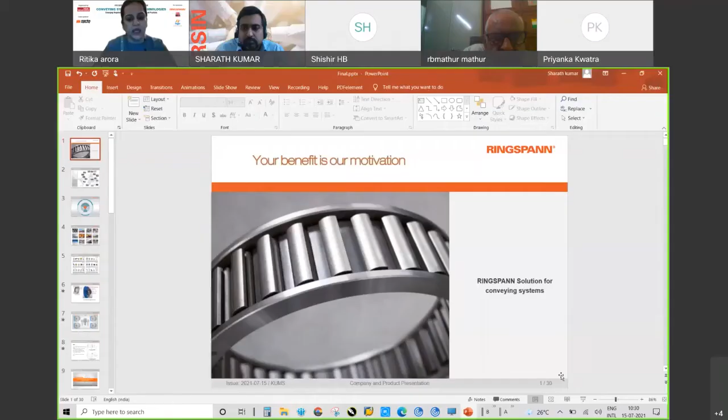Okay, I'll just introduce you. Mr. Sharath Kumar is Head of Business Development at RINGSPANN. He has over 15 years of experience in different sectors of industrial engineering products. He's one of the leaders in the development of the RINGSPANN keyless connection market in India and has developed a special one-way clutch with a thermal expansion compensator for industrial fans, an overload clutch for wagon tipplers, along with integrated solutions with a one-way clutch and brakes for ball mills. He holds a master's degree in industrial product design.

Sir, I think you should be having the presenter rights now. Yes, hope you can see my screen and hear me. Yes, we can see it. Yes, sir.

Okay, good morning everyone. First of all, thank you very much to India Infrastructure for giving a platform in this difficult situation to connect with everyone. So basically this presentation is divided into two parts. I have a little bit about the company, and then we'll go to the solutions which RINGSPANN can offer.

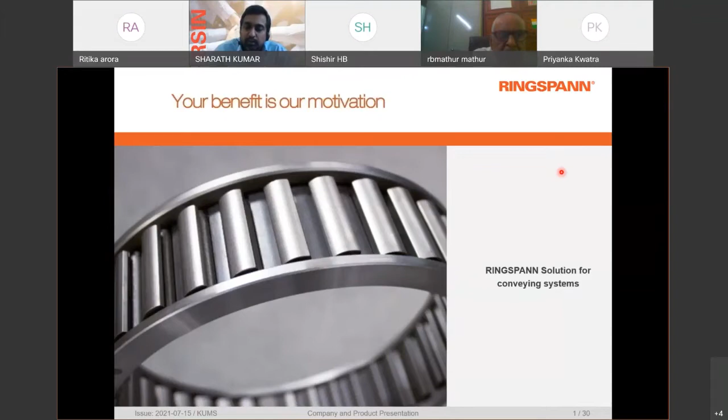RINGSPANN is a German organization with more than 75 years of experience, and we have manufacturing facilities.

Hello, there is a disturbance. Can you please someone mute it? Yes, sir.

So RINGSPANN India is located in Pune, and we have our offices in Germany, Italy, and also in China.

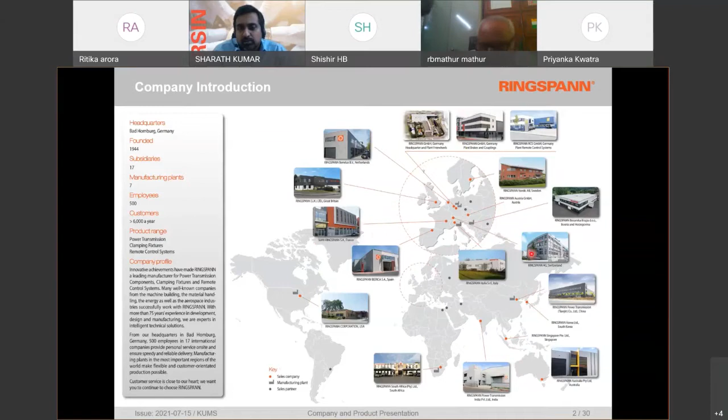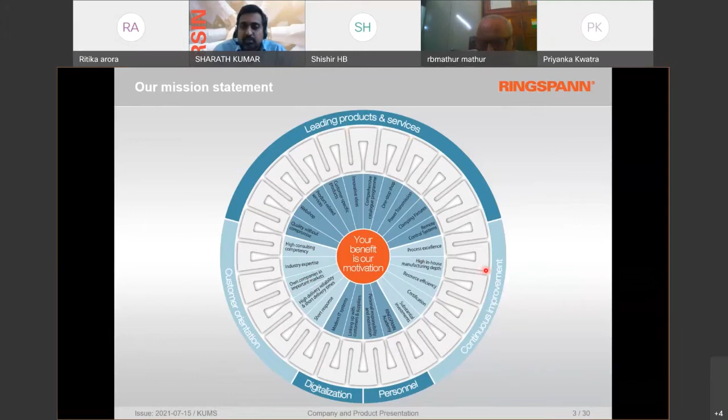Our mission statement, RINGSPANN, working on your benefit is our motivation, and it is around leading products and services, continuous improvement, digitalization, and customer orientation.

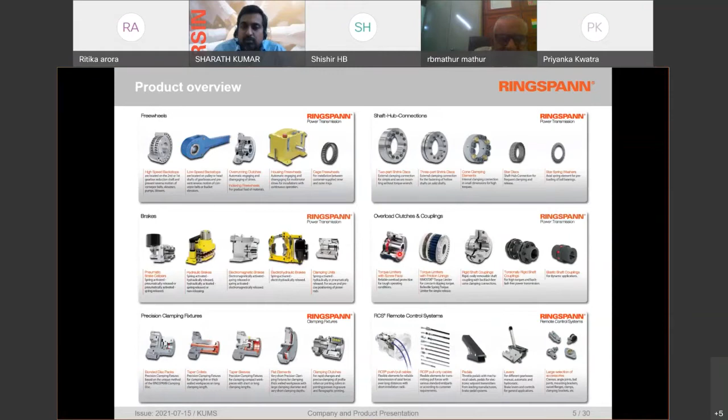Our main products are free wheels, generally called a one-way clutch or a backstop. We also have shaft connections, generally called a shrink disc, taper lock, or keyless connection. We also have a wide range of brakes starting from hydraulic, pneumatic, and electro-hydraulic brakes, as well as a huge range of couplings and torque limiters.

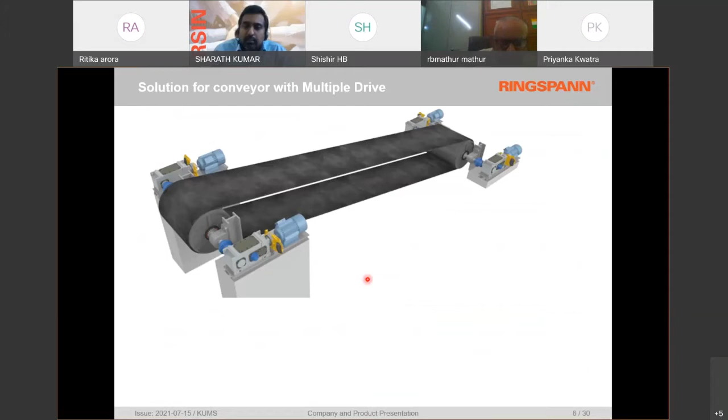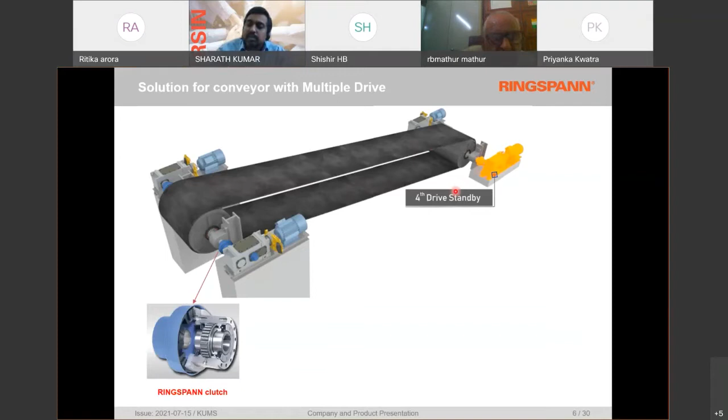Solution for conveyors in a multiple drive system. Mainly in a multiple drive system, you can see here there are 4 drives, 3 of them in operation and 1 in standby. We can find such conveyors generally in long distance or high capacity conveyor systems.

For this application, we have a one-way clutch which can facilitate automatic engagement and disengagement of the drives. We also have a special torque limiting backstop which will facilitate load distribution, better.

Hello, someone from India.

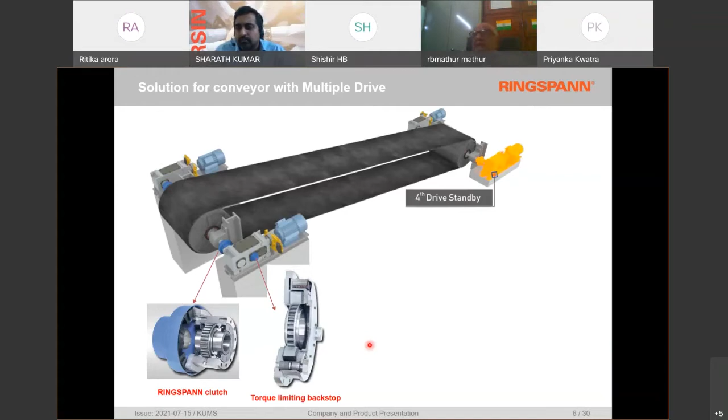So what is the difference between a standard backstop and a torque limiting backstop seen here? You can see the standard backstop has an inner ring, cage, and outer ring. However, when we look at a torque limiting backstop, it has an inner ring, cage, and a friction pad which will facilitate slipping of the backstop and distributing the load between all the drives.

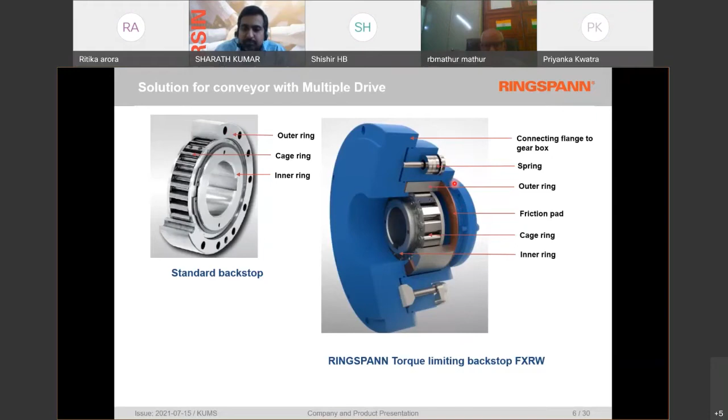There's also a spring and a compressed spring for keeping the elements together and setting the torque for distributing the load at a certain level. Here you can see a small video - when generally the conveyor is running, the backstop is freewheeling. That means there is no contact, and because of a lift-off design, no wear is taking place.

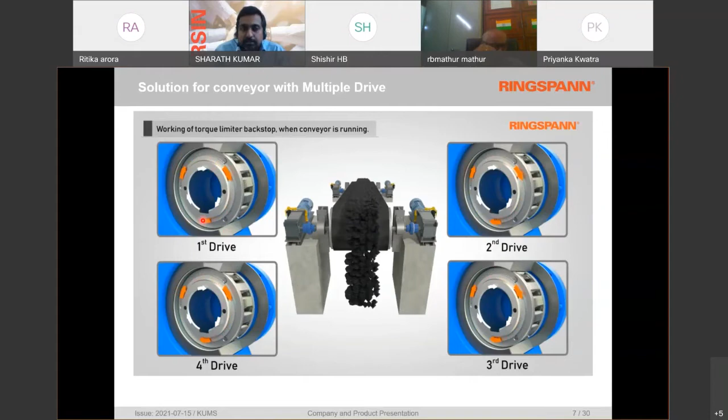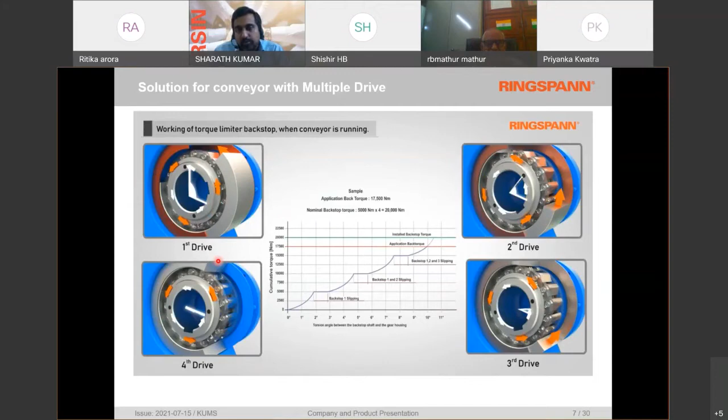But as the conveyor stops, you see the first drive slips, then the second, third, and fourth. This drive slipping concept is where the entire reverse load of the conveyor is distributed equally between all four drives.

What is the benefit of using a torque limiting backstop and an overrunning clutch in a multiple drive conveyor system? First, it gives flexibility to automatically engage and disengage the drive systems. There is no need of stopping the conveyor, especially if you're using a jaw clutch mechanism.

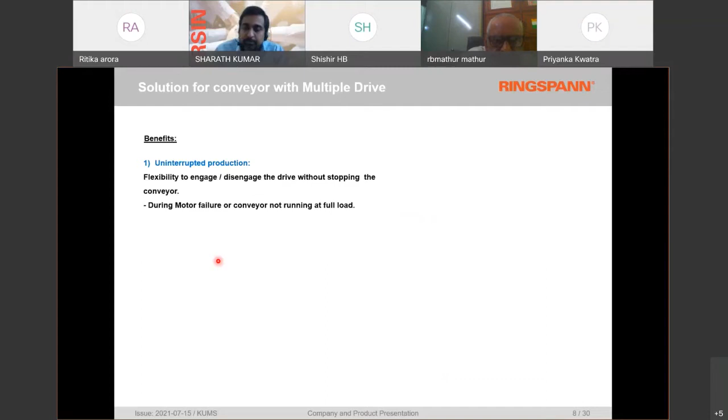An optimum cost-effective design - generally if you use standard backstops, the peak load could be around 2.75 times. But if you use a torque limiting backstop, you can select it with a minimum service factor of around 1.2 itself. With this, you can reduce your complete drive system and optimize the entire drive system.

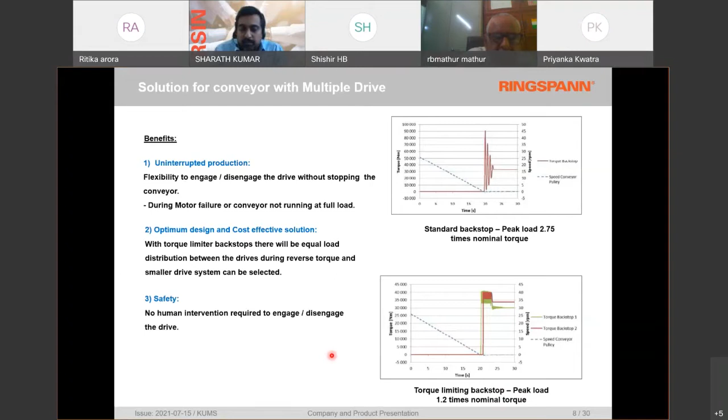The third point is safety - there is no need of any human intervention, so human error or any damages can be avoided. This can be done directly from a center system.

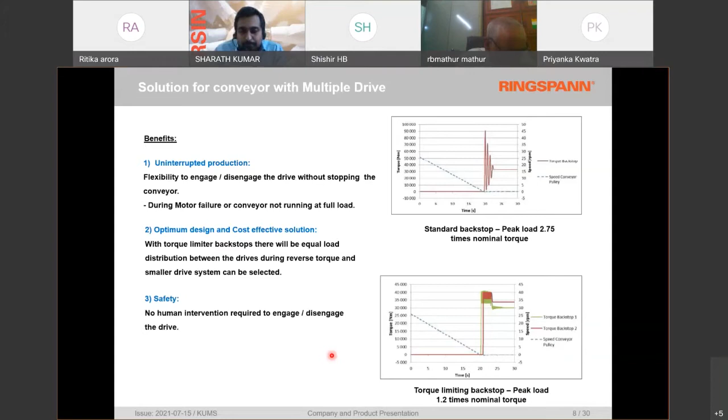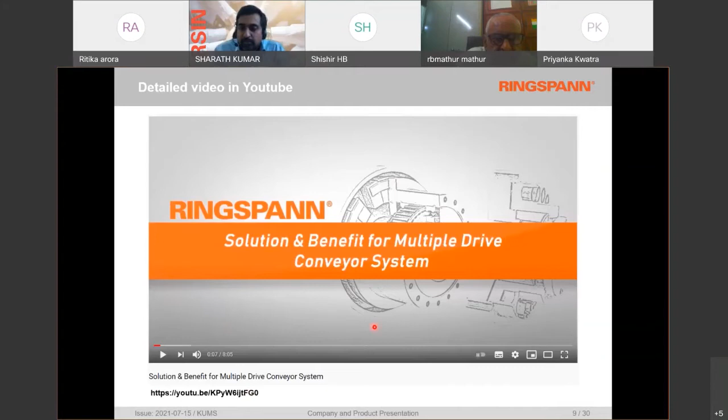We also have a very good video on YouTube where you can look at the detailed working of this backstop and clutch. It's available on YouTube, given in this link, and I kindly request everyone to look into this and understand how it completely works.

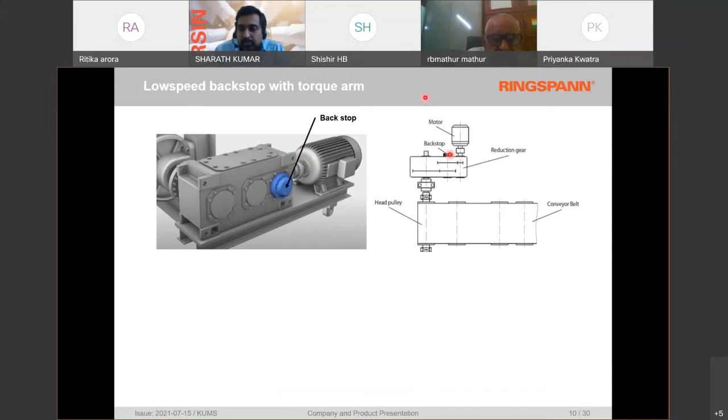Another product which I would like to discuss is the low-speed backstop. We generally know that backstop for an inclined conveyor is fitted on the gearbox. This is the location you can see here.

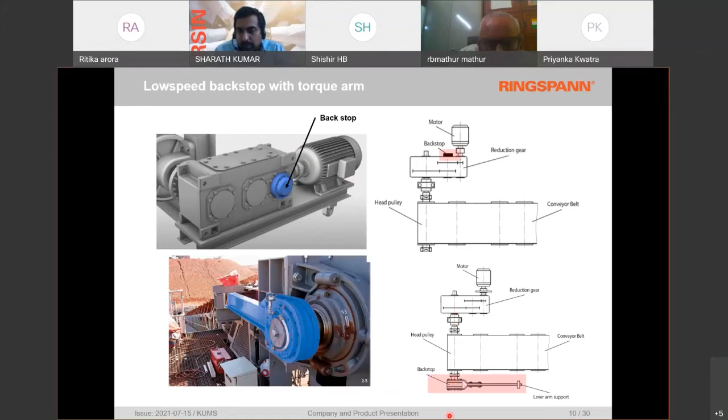But there is always a possibility the backstop can be directly fitted on the pulley shaft as shown below. So what is the benefit of this kind of arrangement? First, it acts as a primary safety device, so any damage in the coupling, gearbox, or any components, your pulley is still ensured it will not roll back in case of inclined conveyors.

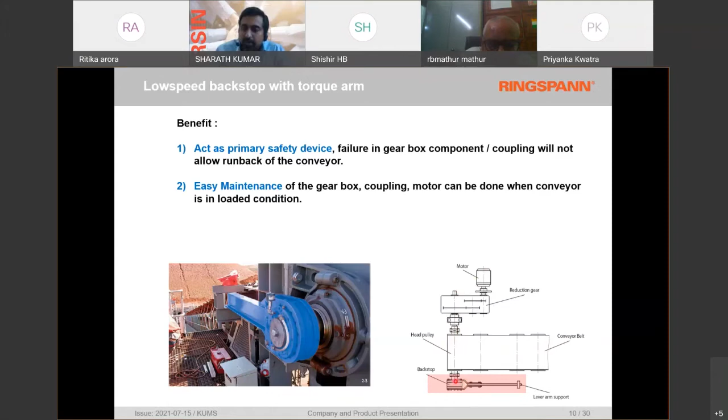Another important point is easy maintenance. Generally such breakages take place when a conveyor is in loaded condition, but then you have to unload and do all the activities. By using a low speed backstop as shown below, you can change the gearbox, coupling, or motor while the conveyor is still loaded, because the backstop is directly on the pulley and can hold it from running in reverse.

Also, when we speak about CST drives, it's very critical, because in the CST drive there is no possibility to put a holdback directly on the gearbox. So the only option is to put a low speed holdback or torque arm holdback directly on the conveyor pulley.

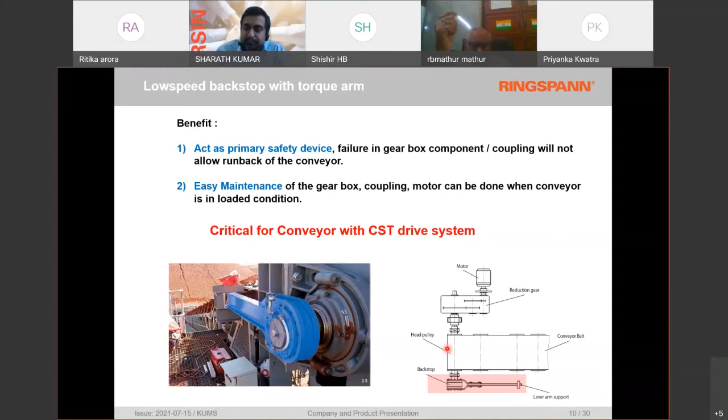Ringspann also has a wide range of brakes. We have brakes starting from 0.2 kilonewton meter to even the big brakes used for downhill conveyors or port applications, ship-shore cranes, going up to 750 kilonewton meter of torque.

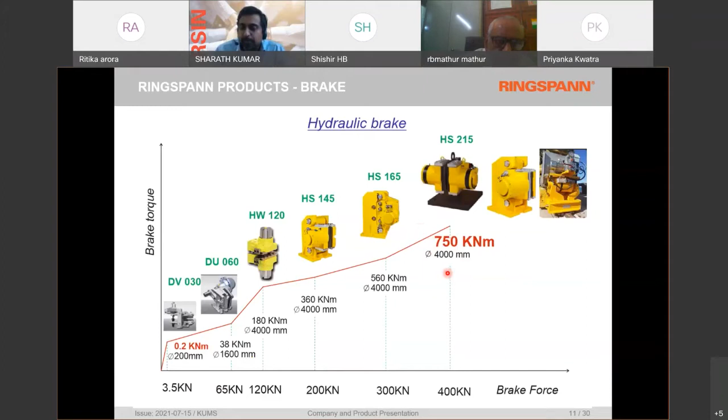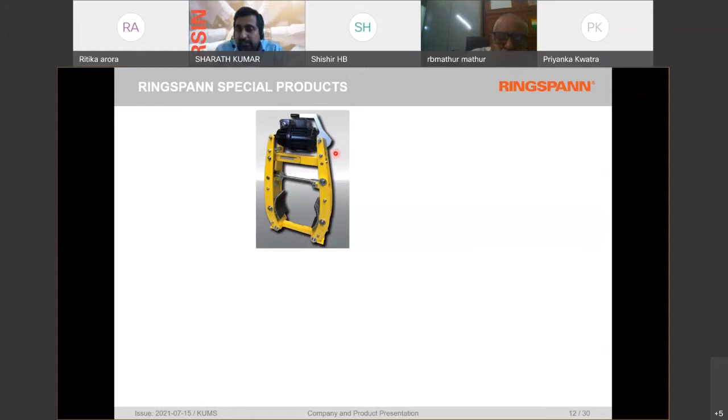We also have special brakes like this one shown here. This is a thruster drum brake, but with a horizontal thruster mounting. The biggest benefit of this horizontal thruster mounting is you can reduce the overall space, especially in a crane application or in a stacker reclaimer.

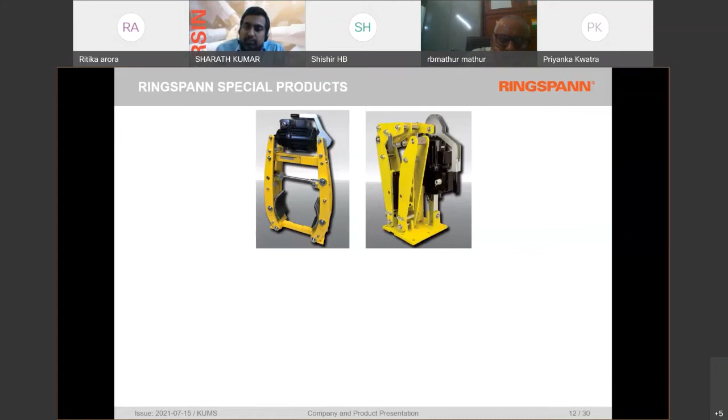We also have brakes with thruster disc type, very much used in wagon tippler applications for quick reaction.

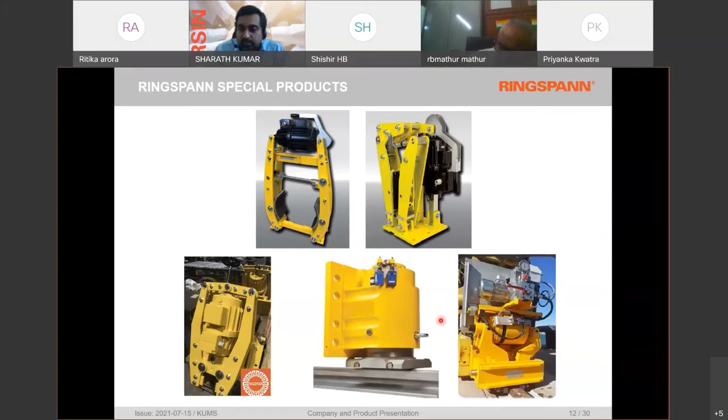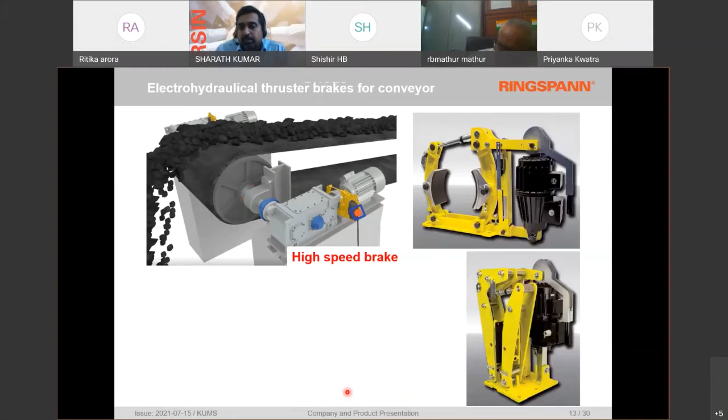Electro-hydraulic thruster brakes are quite common in the market, and what RINGSPANN offers is that all our electro-hydraulic thruster brakes are provided with automatic wear adjustment.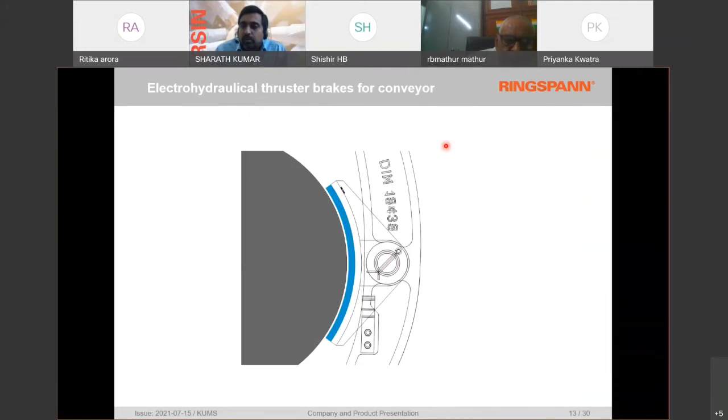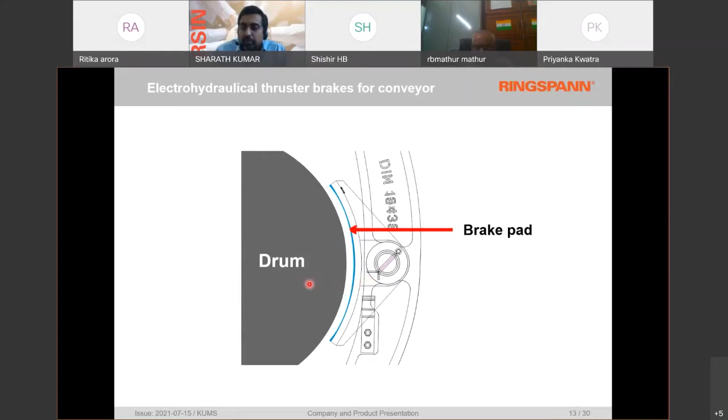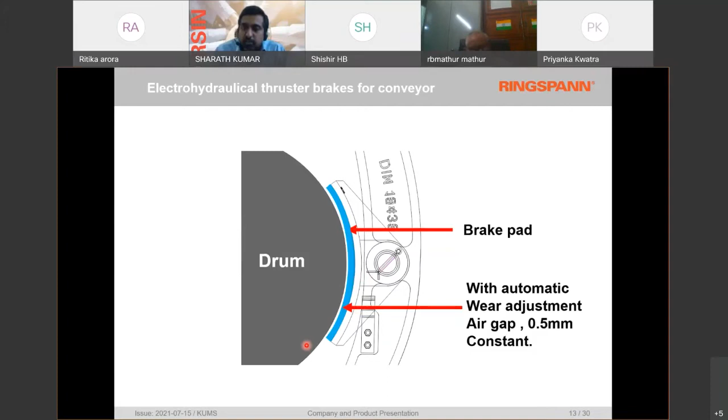The benefit of automatic wear adjustment: we all know every time the brake is applied, you can see here this is the brake pad and this is the drum. Every time the brake is applied, a gap is created between the drum and the brake pad. This gap continuously increases until someone manually adjusts the brake. But with automatic wear adjustment in the thruster brakes, this gap remains constant at 0.5 mm, so human intervention to adjust the gap can be completely avoided.

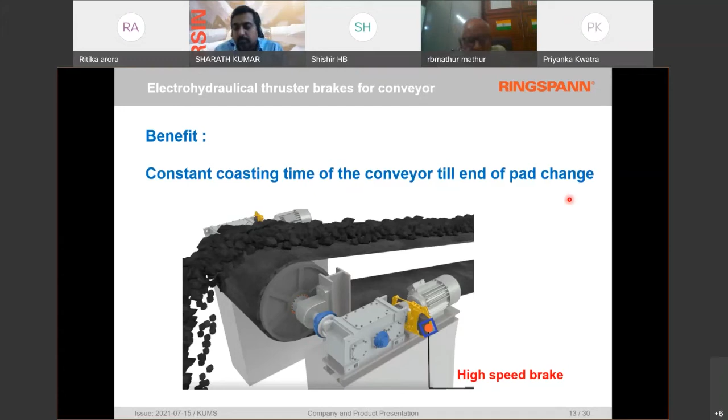The most important thing is, what is the benefit of using such a design? The coasting time of the conveyor will remain the same until the end of pad change. Because the gap is constant, the time loss due to closing the gap and the braking force loss is completely avoided, and you get very good repeatability, with the coasting time remaining constant.

Some more benefits of using RINGSPANN thruster brakes. First, these thrusters are 100% RINGSPANN's own thrusters, made in our European works. Second, we give thrusters with automatic wear adjustment, and all our brakes have C3 painting, making them suitable for corrosive atmospheres, and designed as per DIN standard, so replacement of brakes can be done very easily in the future.

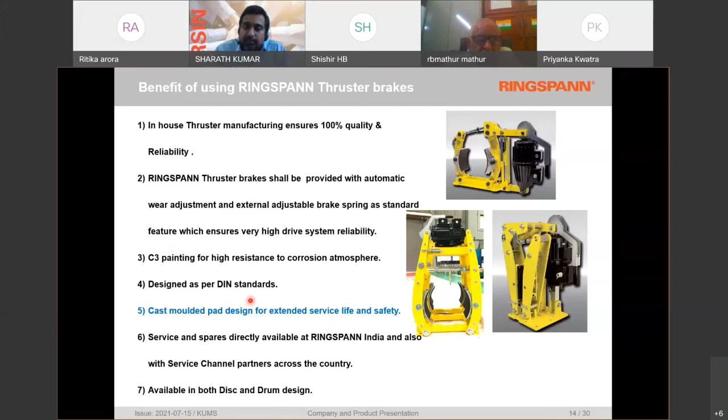Our brakes are also provided with cast mold pad design. Generally brake pads are provided with a riveted design, and because of this design, the riveted design limits prolonged use of the brake pads, as the rivet comes in contact with the drum and causes damage to the drum. But RINGSPANN provides a cast mold and resin integrated pad design. Because of this, there is no rivet, and you can use the pad to its fullest capacity.

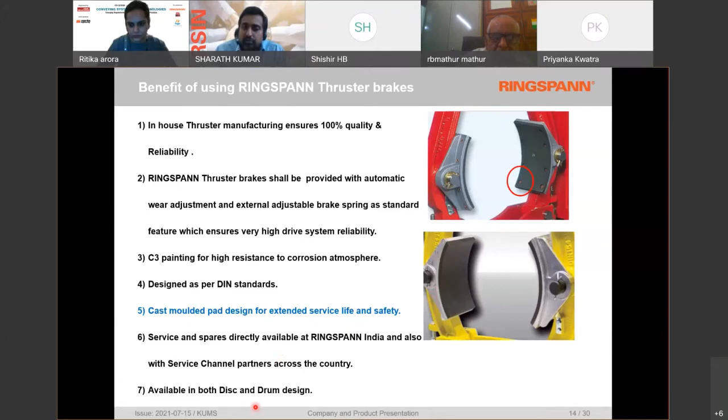Moreover, the brake shoe is provided with an aluminum material, so that after prolonged use there will be no damage to the customer's equipment. We also have spares available directly in India, in both disc and drum designs.

Some more options for these brakes. We have brakes with throttle valve. In certain applications, you want to close the brake in a controlled way, so that quick action doesn't take place. So we can give brakes with a throttle valve, so that slow application of the brakes can take place.

Heat resistant design with wider brake shoes. In some applications, the brake pads get worn out very often, so in such cases we can surely use wider brake shoes. Friction lining with sintered material is also available. We also have thrusters with special oil grades for -30° operating temperature.

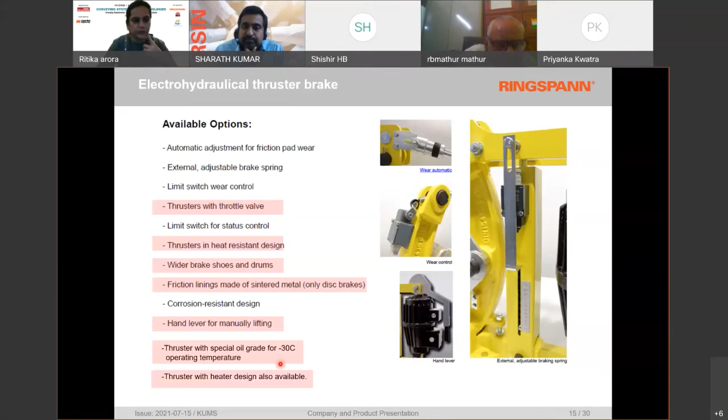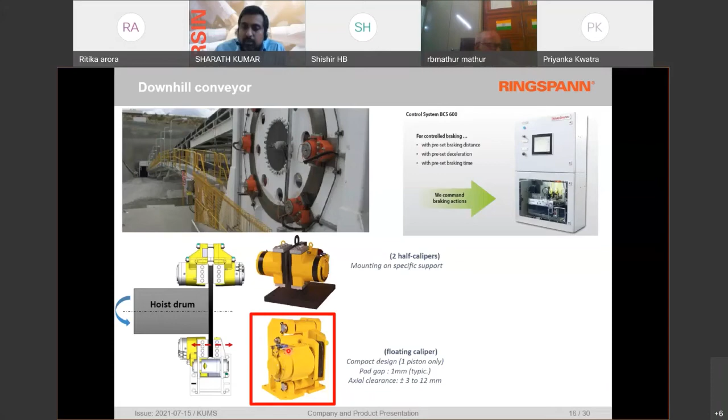We also have solutions for downhill conveyor applications. We have two types of brakes for downhill conveyor. One is with a double jaw, which is quite popular in the market, but we can also use a floating caliper design. The benefit of a floating caliper design is, first of all, it's cost effective compared to double jaw, and also it can accommodate up to

3 to 12 mm of axial misalignment. So if this pulley is trying to move a little bit, we can use a floating caliper design which can take up this type of movement. We also have a control system with hydraulic power pack, especially for downhill conveyor. So this is also available with us.

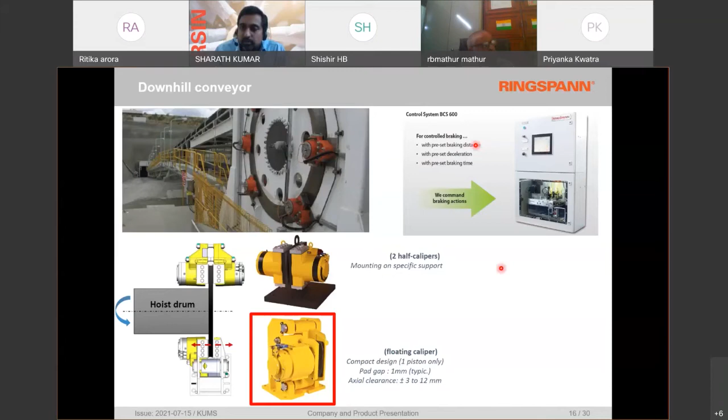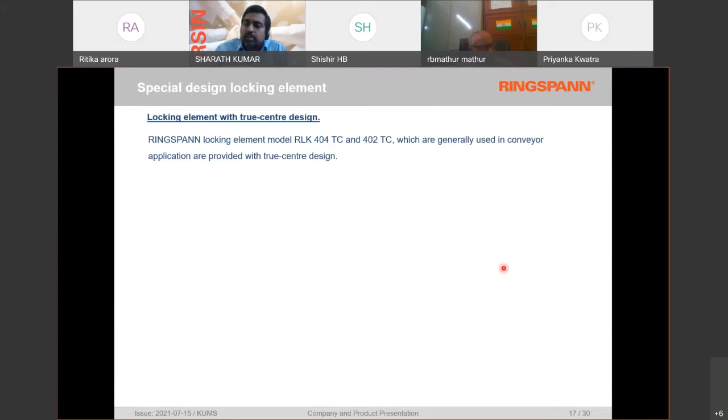We also have special locking elements. Generally, RINGSPANN locking elements are provided with a true centering design. You can see the difference here between both types of locking elements. The true centering design means it is not completely split, it is half split. But the other locking elements generally available in the market are totally split into two halves.

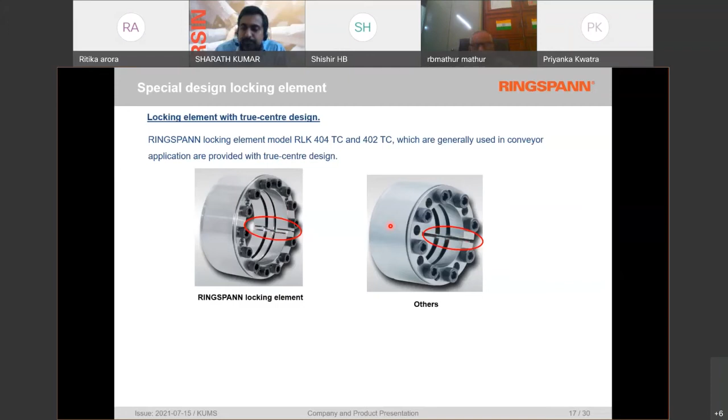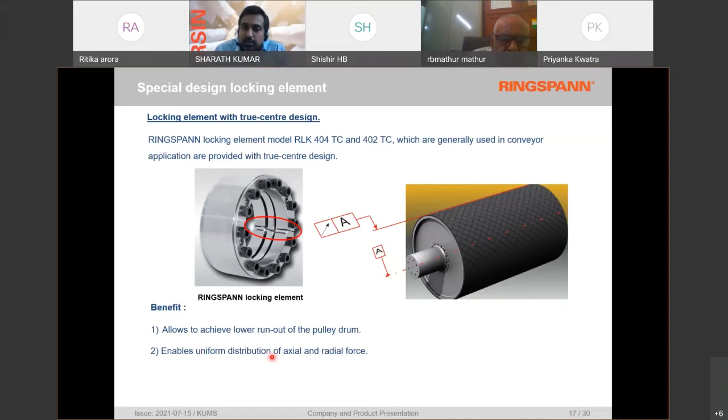So what is the benefit of using a true center design? The first benefit is you get a very good runout compared to a completely split design. As this is half split, it will ensure there is no much variation between the shaft and the pulley outer diameter, and in turn it will also increase the bearing life. Also, it helps ensure uniform load distribution, and also gives easy assembly.

A general problem with locking elements is that after a few years of operation, it is very difficult to remove them from the conveyor pulley. That is due to fretting corrosion and also no much clearance at the backside. But by using this design, it will ensure the pressure generated on the pulley is always constant, and also ensure you can remove the locking element from the pulley very easily after prolonged usage.

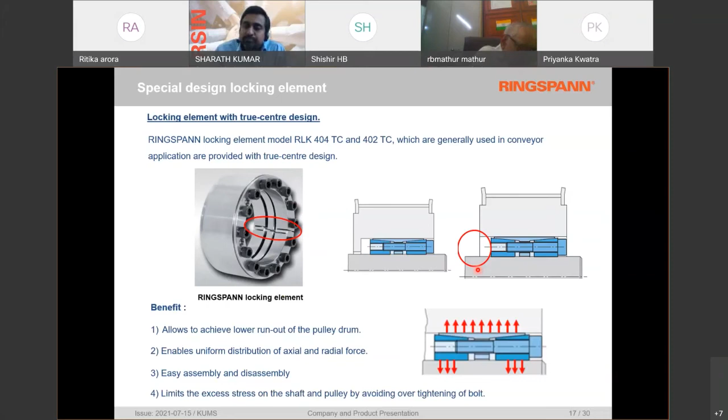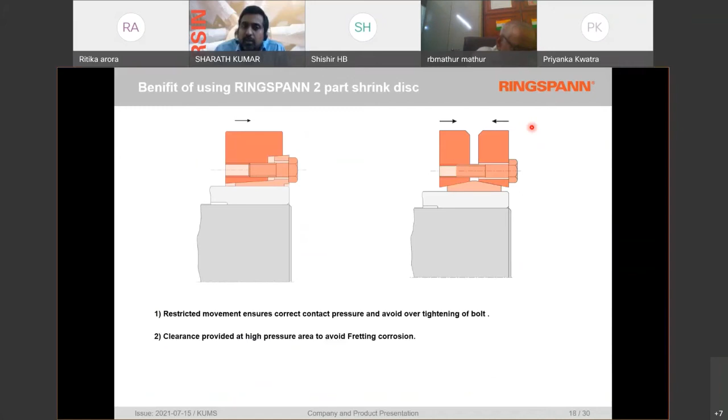We also have two different types of shrink disc. You can see here, this is a 2-part shrink disc and also a 3-part shrink disc available with us. The benefit of using a 2-part shrink disc is mainly related to avoiding fretting corrosion. In a 2-part shrink disc, you will not be able to over tighten the bolt, so the pressure generated on the shaft will be constant, and fretting corrosion could be avoided.

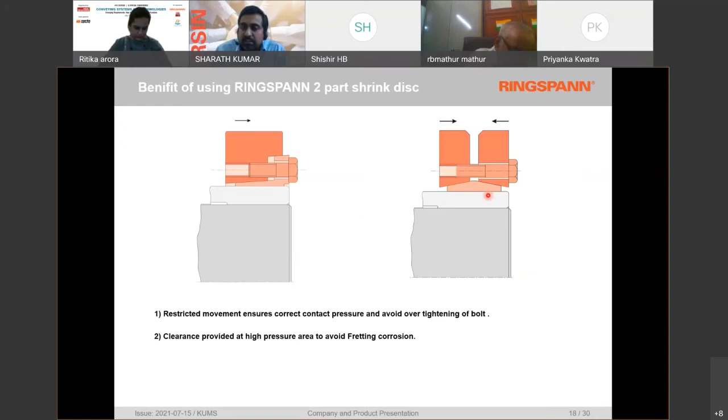Jacking holes are also provided in the 2-part shrink disc, you can see here, so that after years of operation, especially in stacker reclaimers, you can use the jacking holes and pull the shrink disc out. Generally in a 3-part shrink disc, you don't have this, and the inner cone will almost get stuck with the hollow shaft of the gearbox, so generally you have to cut and remove it. Such issues can be avoided by using a 2-part shrink disc design.

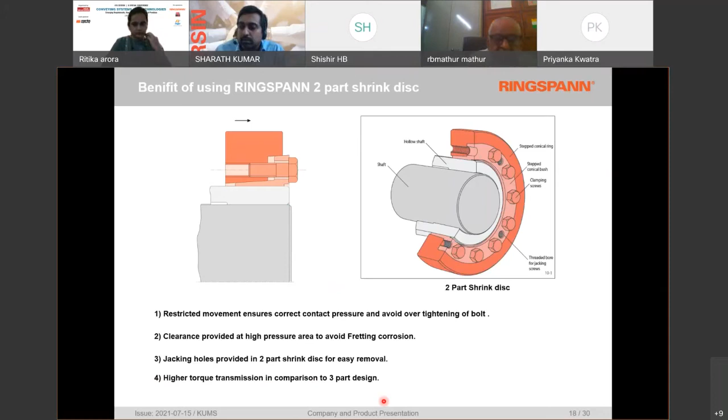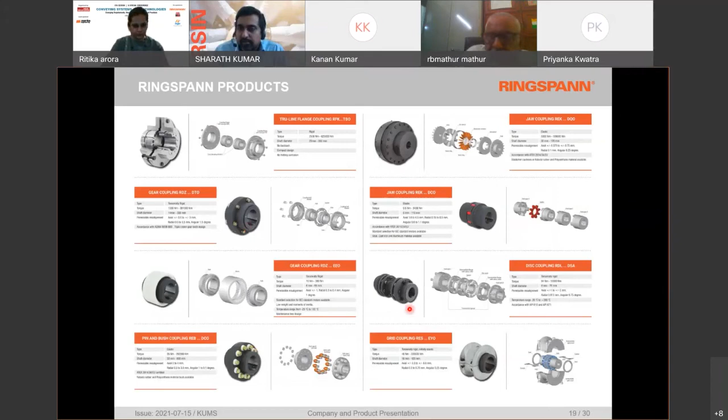Also, the torque transmission is comparatively higher in a 2-part design compared to a 3-part design, which is quite commonly available in the market. We also have a huge wide range of couplings: pin bush, jaw coupling, disc, and also grid couplings and resilient couplings available with us.

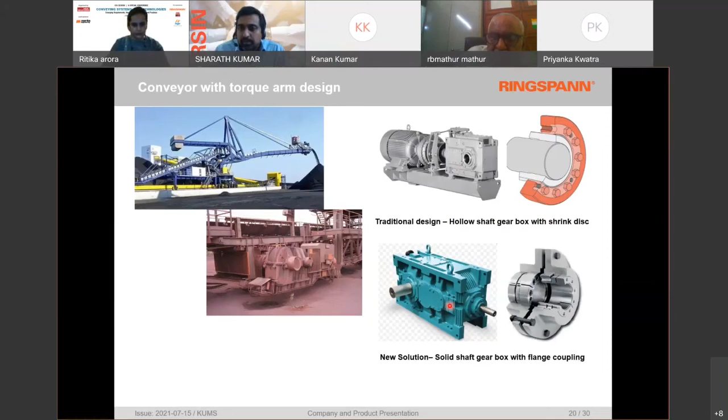Especially for conveyor applications or in stacker reclaimers, the general torque arm design and shrink disc is used to connect the hollow shaft of the gearbox. But there is also a possibility you can use a solid shaft gearbox with flange coupling, which is shown here. With this shrink disc, again, over years of operation, removing this gearbox is really a difficult task because of fretting corrosion. This could be avoided by using a flange coupling as shown below.

And very less space is required. When you use a hollow shaft gearbox, you also need to give an extended shaft where required space is given so that the gearbox can be completely moved out. So in turn, your entire structure for the boom conveyor becomes bigger.

But with a flange coupling design, it's not required, because the coupling can be disengaged exactly at this flange point, and both gearbox and drive can be easily disconnected at the connection area itself, rather than giving extra space to remove the drive system.

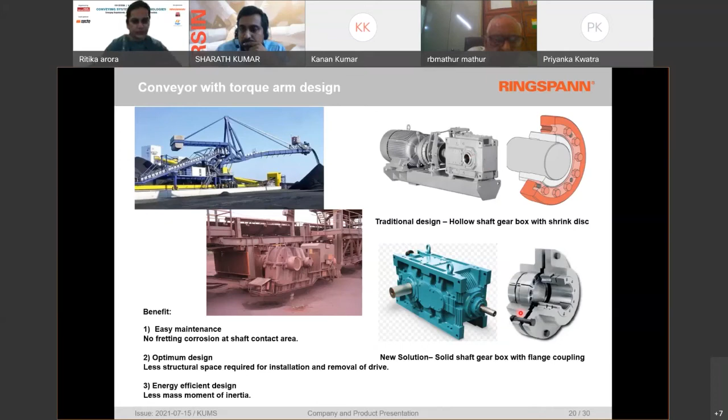Also, the weight of the coupling and less mass moment of inertia. We also have systems for wagon tipplers.

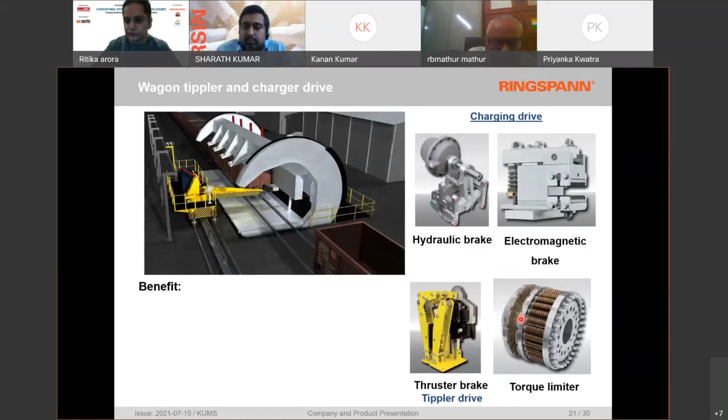You can see here we have this torque limiting function, with a sintered pad, which can be an efficient design.

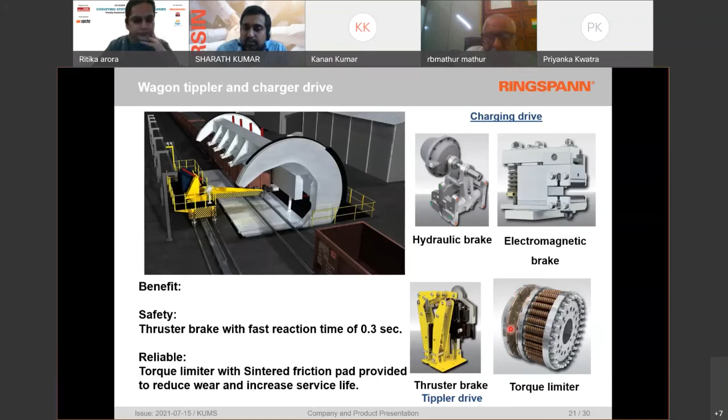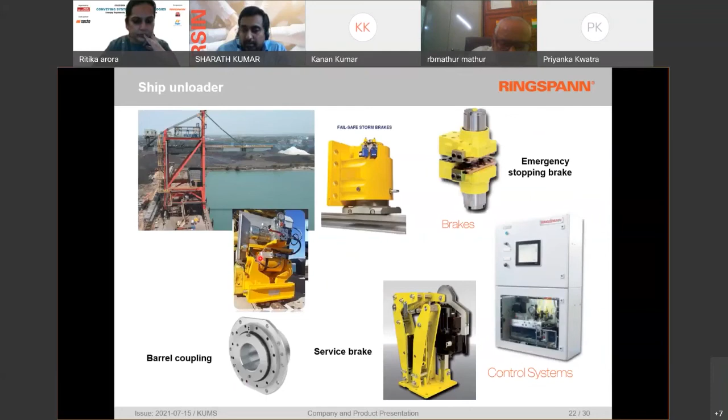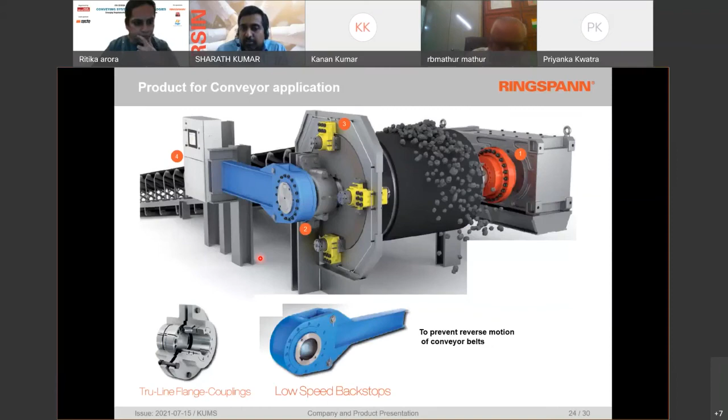So quickly, for ship unloaders, we have brakes: service brake, emergency brake, storm brake, and also barrel coupling available with us. For conveyors, we can give thruster brakes, high-speed backstops, shrink discs, cone clamping elements, flange couplings, low-speed backstops, and downhill conveyor brakes with control system.

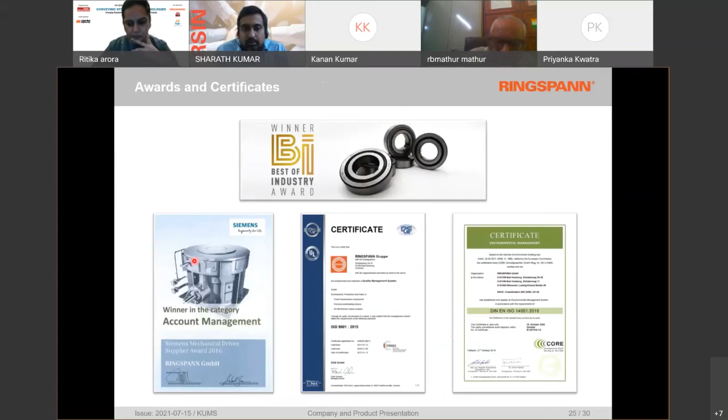We have some certificates and awards, including a key certificate from Siemens India, also for best account manager.

Our presence in India includes 4 sales offices, and we have a very good dealer network for supporting end users. We also have training and service capability in India.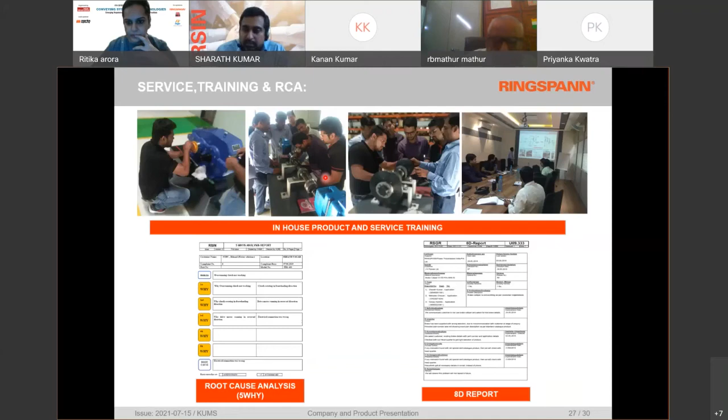We also have a product with condition monitoring. The previous speaker was talking about Industry 4.0. So we have clutches with sensors so that condition monitoring can take place.

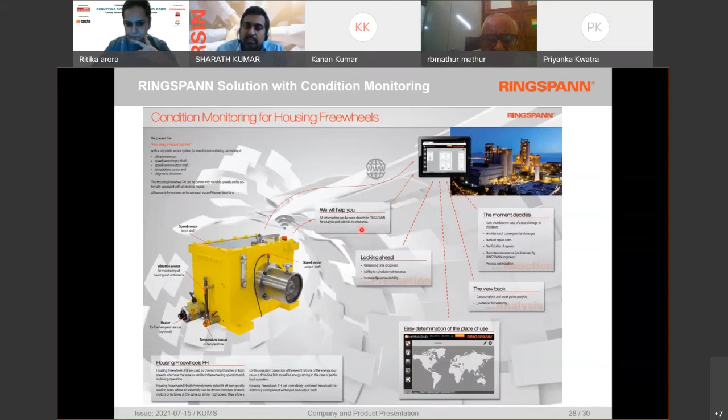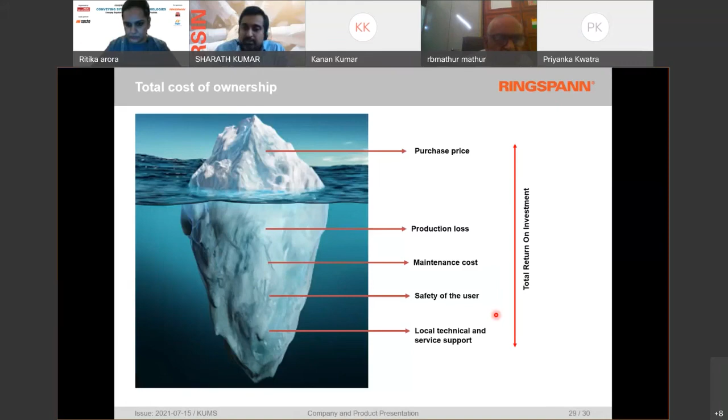Thank you very much. It was very quick, lots of slides, but I think I have shown some interesting products.

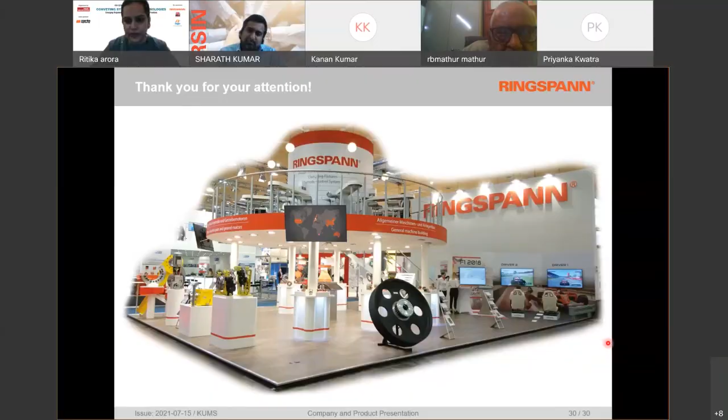The first question is from Mr. Ashish Yadav, who says they are facing a lot of issues with holdback failure and are not able to find much data. Do you have any literature on backstop or gearbox holdback?

Yes, we have a lot of literature on the RINGSPANN website. There we have given information about torque limiting backstops and also different backstops, so that can be looked at.

He's also saying that they would like to connect with you for stacker brakes also. Yes, sure, please share the contact details and we can get connected.

Another thing he wants to know is, do you also provide guarding solutions with thruster brakes? We can give the guards for a thruster brake.

Next question is from Mr. Lakshmikanta Sahu: what is the material of the brake pad? It's an organic brake pad. There is no asbestos used.

Next is from Mr. Sumit Agarwal: do you provide brakes for dryer and kiln applications also, so that they don't reverse during power failure? Yes, we can give this for dryer and also kiln applications, to protect against the kiln or dryer running in reverse. It's possible.